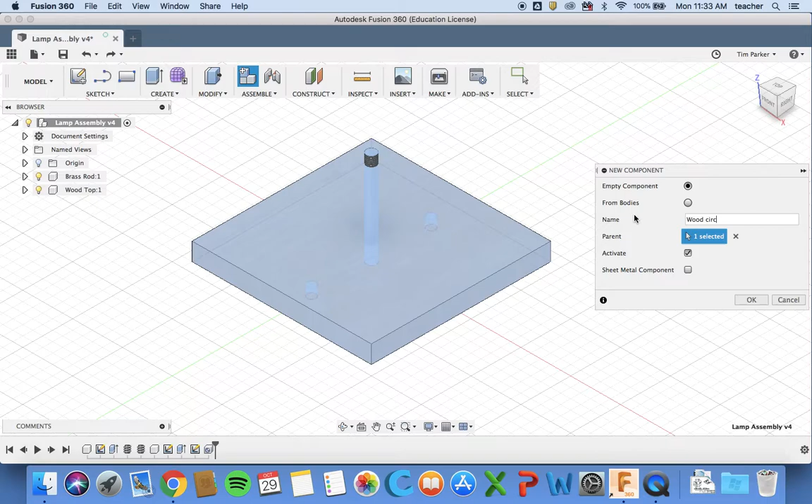I'm going to make sure I've activated my top assembly component, then create a new component, and I'm going to call this wood circle hole. Now at the minute I can still see my other components, so I might just want to make those invisible, so I'm just focusing on the one I'm drawing right now.

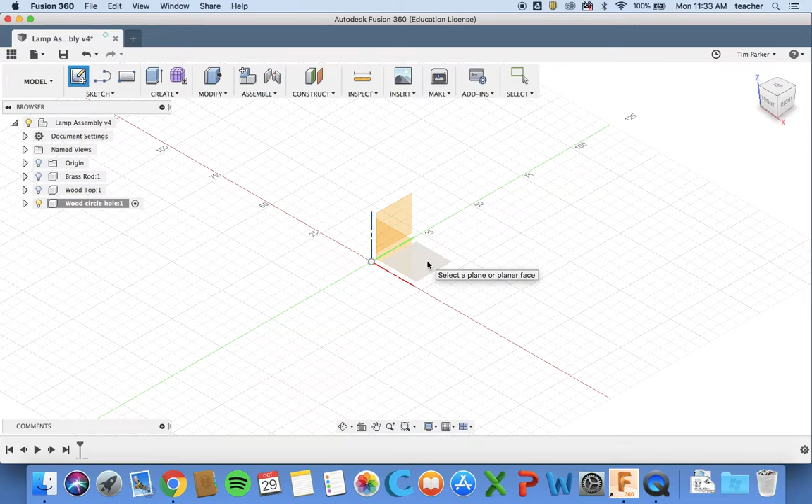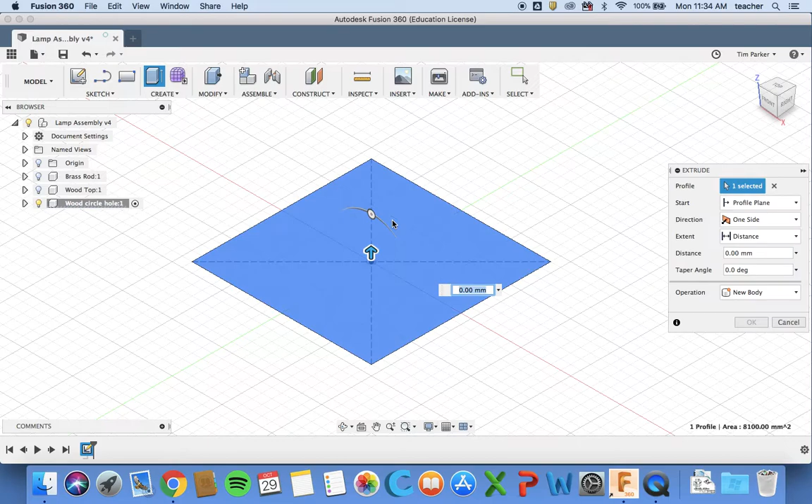So to do that, just like we did before, we're going to create a new sketch and select this plane again, the XY plane, sketch, rectangle, center rectangle, 90, then click tab on the keyboard, 90, enter. I can click stop sketch, and now I'm going to modify, so I'm going to pull it up by—you'll see the wood again is 9 millimeters thickness, so 9.

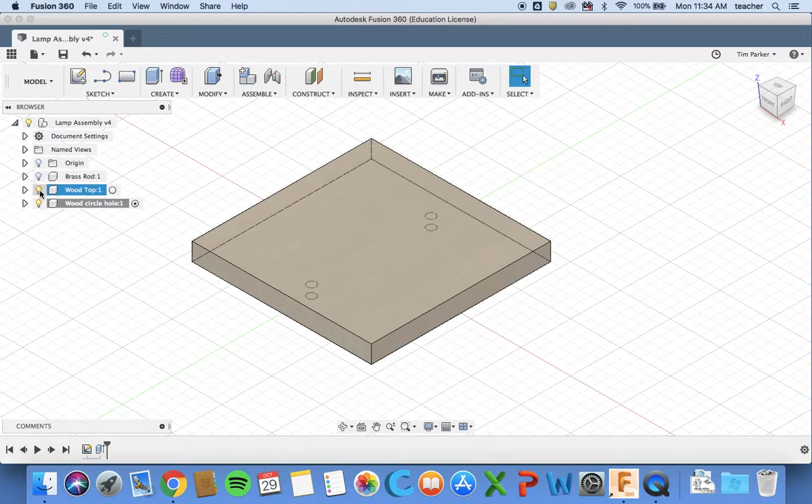So the next stage is I need to put my two holes for my brass rods. They are 45 millimeters this way and 15 millimeters from the edge. A good idea here is to turn on any other wood bits you've done and check where they've drawn their holes, so you match yours up the same. I might just leave those on for a minute, and I'm going to go to sketch, point.

Now this time, because it's drilling the whole way through my piece of wood, I don't need to worry about drawing it on the bottom. I can actually just draw it straight on the top. So I'm selecting my top face, making sure it's highlighted, and then I can draw it anywhere for the minute, and I can also draw another point over here.

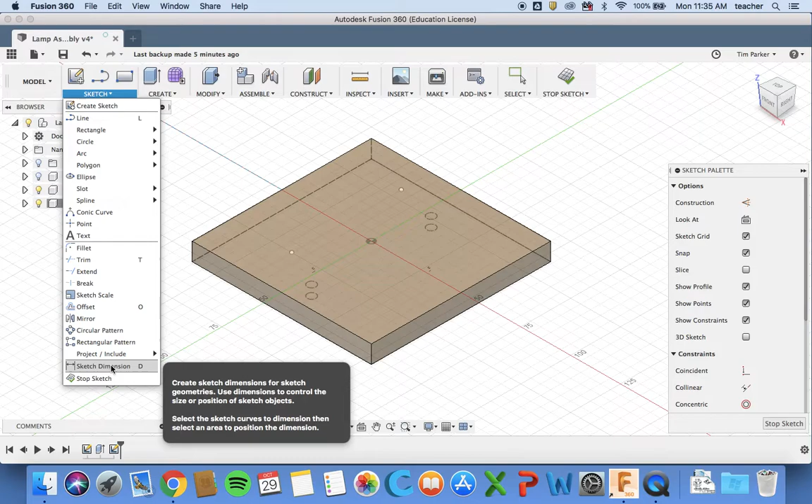Then I'm going to go to sketch, sketch dimension, and make this 15 millimeters from this edge. So I've clicked my point, clicked my edge, 15, and it needs to be 45 millimeters from this edge, 45, and you can see it's lining up over the top of my other one.

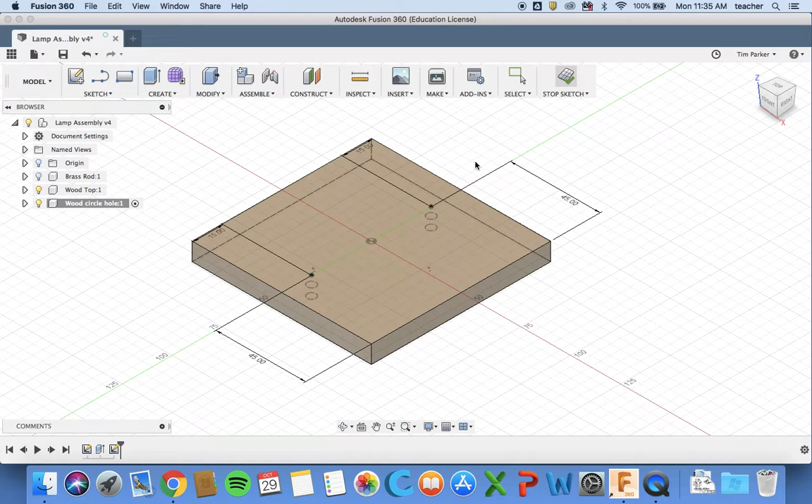Do the same with this one, 15 from this edge, and 45 millimeters from this bottom edge. This is basically just constraining it so it can't move accidentally by itself. Now I can click stop sketch, and you can just double check that—if you look here, you'll see it's all lined up. I click on different views, go back to my home view.

So I can turn off my wood top underneath, and now I'm ready to actually make the hole. I'm going to create a hole, select each of these points, and it's remembered the settings from last time. So 5 millimeters in depth, but this time remember we want to go the whole way through, 9 millimeters.

So I'm going to click, put that to 9, and then just double check. This is already set, but now this time I don't want to have a tapped hole—I want this to be what's known as a clearance hole where it can easily slide on and off. So this time it needs to be diameter exactly 5 millimeters. If I had a screw thread on it, the M5 screw thread, it would actually be 4.23.

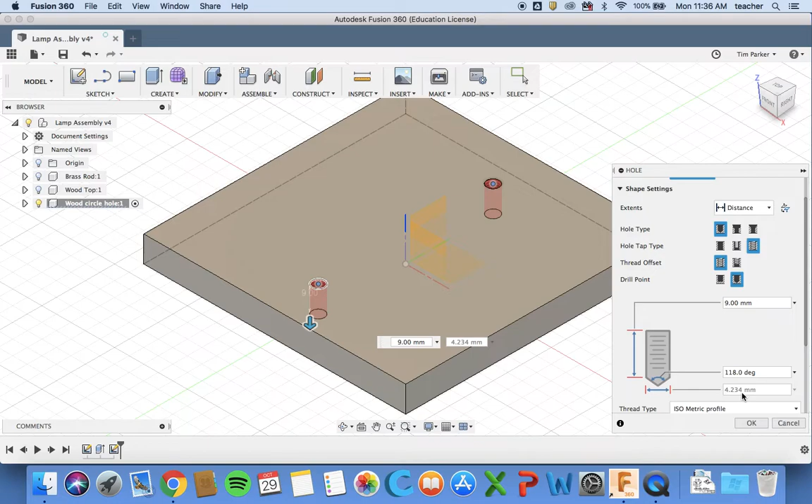So I'm going to turn the tap off, and put it to simple, and have this as 5 millimeters. That means it slides on nice and easily. And that's us done.

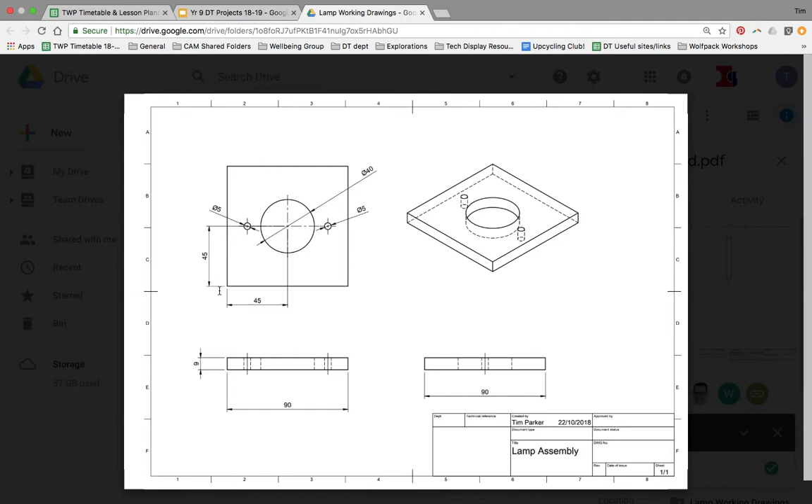Then now all I need to do is add in my center hole. My center hole has a diameter of 40 millimeters, and it's right in the middle, 45 millimeters, 45 millimeters. So again, I go to sketch, point, just draw it on the top area—I'll put it here for the minute. If I click D on the keyboard, that'll give me my dimension.

Click between these 2 points, drag it down, 45, and then again between this point—oh no, done that one, sorry, between this point and this point. Oops, I need to get my sketch dimension up again. So between this point and this edge—I've already done it. There we go, 45 millimeters. You can see it puts it exactly in the middle.

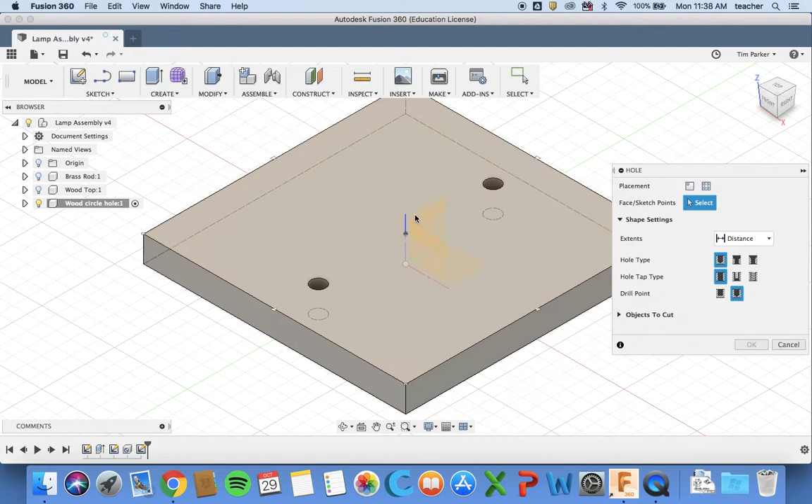So I can stop that sketch. I can now go to create hole, choose my point, and then adjust it. We had 40 millimeter diameter going the whole way through, so diameter is 40 millimeters, and it goes through 9 millimeters, and it's a simple hole—it's not got any screw thread on it.

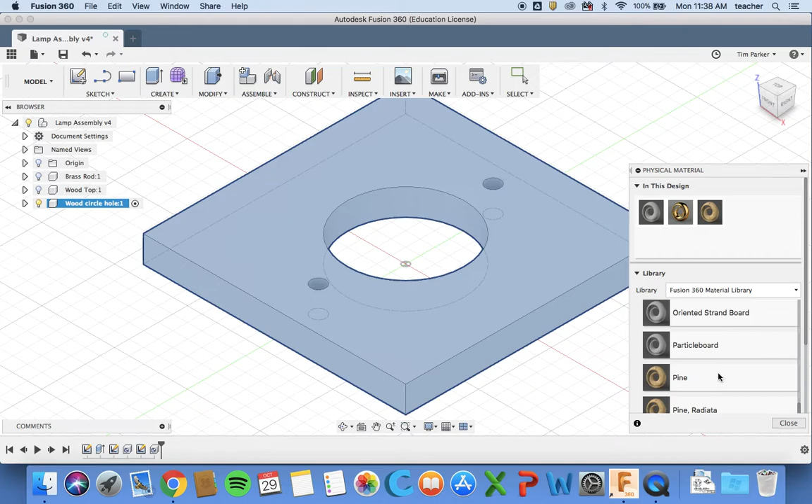Hit OK. And then the last stage is I've now got everything done, I just need to make it wood. So I right click, physical material, same as what we had last time, find my wood. I'm going to do pine, drag it in, click close, and then I'm going to save.

So we've now got 3 parts. We've got our brass rod, if I turn that on, we've got our wood top, and we've got our wood circle hole. Go back and activate my whole thing.